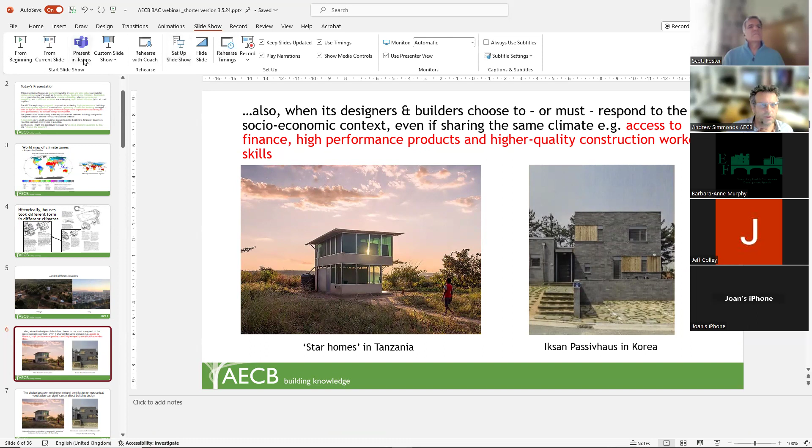Thank you, thank you, right, it was good to be here. Let me just share the slides there. So okay, so I'm just going to kick off with one slide, and then I'm going to hand over to Huda, and then I'm going to come back to finish off. We're going to go quite fast because this is the edited version and there's quite a lot in it. There's lots of pictures, don't worry, this is the only one with lots of words.

I just wanted to slightly set the scene as to where we're coming from here. So what we're focusing on in this presentation is domestic building. Doesn't mean that this isn't applicable to non-domestic building. We're also focusing on rural or semi-urban context, but I could better describe it as rapidly urbanizing rural contexts, perhaps. The other context is we're focusing on cooling climates, and we are trying to avoid various terms because they're not actually that useful, even if they're a bit disrespectful. So we're not using the term global south - we're being specific about the countries at the moment.

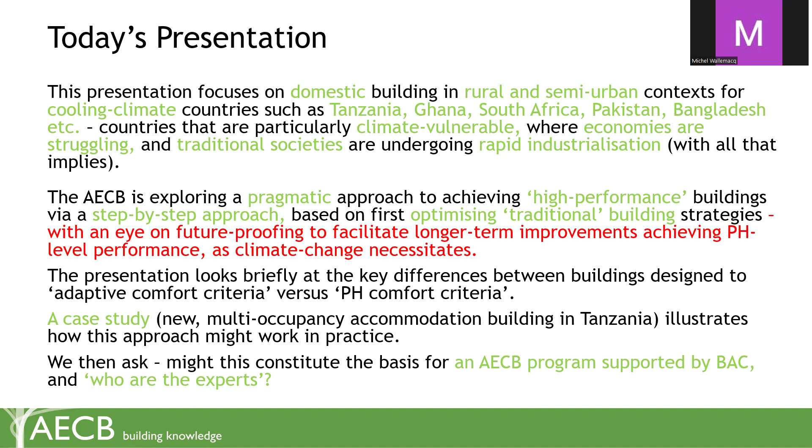Examples of the sort of countries we're talking about are Tanzania, Ghana, South Africa, Pakistan, Bangladesh, and so on. What we're looking at here is countries that are particularly vulnerable to climate change, much more so than countries with more robust infrastructure, perhaps - although, of course, we are all climate vulnerable. Countries where economies are struggling or extremely unequal. I'm not necessarily just talking about Britain, but extremely unequal, and you could say poorer countries, and also where traditional societies are rapidly changing through industrialization. And I could talk a lot about that - just the limited amount I've seen in places like Pakistan and Africa, quite shocking speed.

The AECB, we're an aspirational bunch, but we can also be very pragmatic. Now, over the years, we have developed a common understanding, which will be recognised by all members of AECB, of what a high-performance building means. But we have been slightly questioning that in a couple of instances - one in Britain, because of the decarbonising grid changing the balance between fabric and energy supply, low-carbon energy supply, and also in this context, we've been questioning it as well.

So the sheer scale of the challenge and the sheer speed of basically people building things that are not sustainable and will become increasingly unsustainable has made us start to think about step-by-step approaches, building on what is easier to achieve faster. So we're focusing here on optimizing what might be called traditional building strategies, but what we mustn't do is lock out further improvement that might be able to be made in some of these contexts, for example, towards achieving full passive house levels of performance, but particularly driven by climate change.

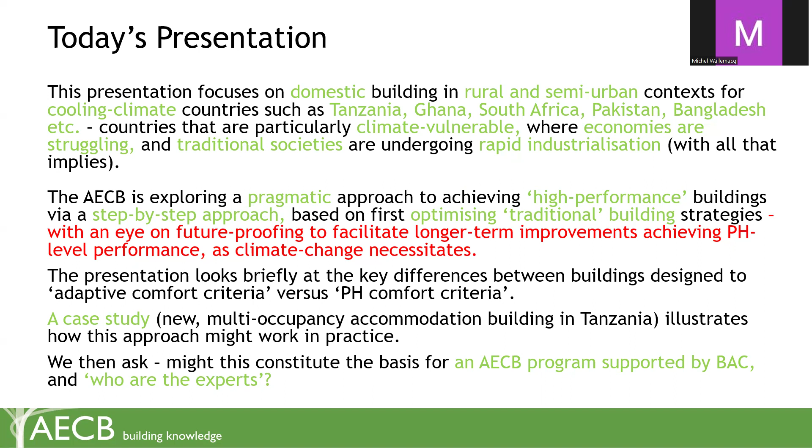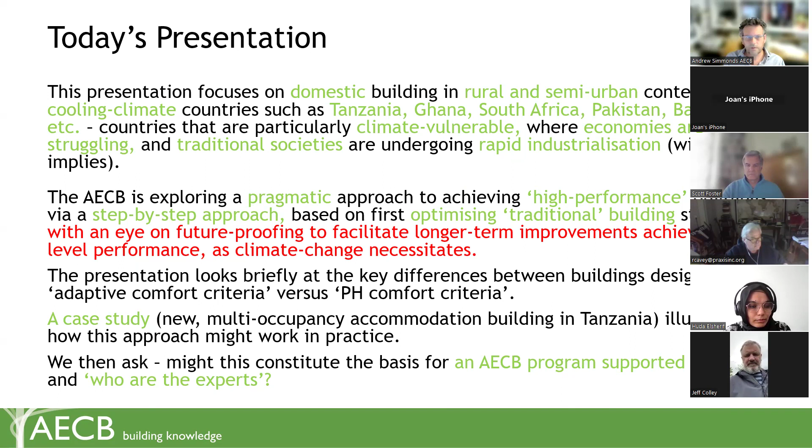Just to illustrate how this approach might work out in practice, and how it worked out in this situation. At the end, this is what we're thinking is a basis for a program that the AECB would like to run and that we would like BAC to support. Underpinning this is who are the experts in a program in this context.

Around the world, there are different climatic zones, and how you classify them depends on the system you're using. At the very basic level, like the passive house divides them into warm, hot, cold, based on temperature. But there's a lot more nuance than that: how arid the climate is, the differences between summer and winter, whether there are monsoons. All these small differences impact how a building should be designed.

Can you go to the next slide? Can you hear me? Yeah.

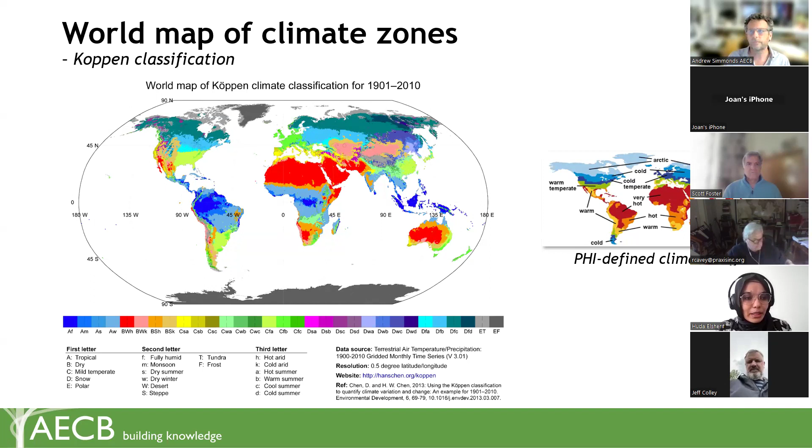Traditionally, most houses were sustainable because people didn't really have an option. Electricity wasn't available, so you had to be passive. These buildings utilized climatic nuances to create a building that was as comfortable as possible. I'm not saying it was as comfortable as a modern building, because there are limitations to what you can do when entirely relying on passive measures. But because of that nuanced design, a sustainable house looked different in each of these climates.

Now, if you think of a lot of modern houses that are not sustainable, why are they not sustainable? Because the house would look the same regardless of the climate it's in, and electricity or energy is being used to offset that. So there is a lot of knowledge that exists in traditional building on how to adapt to different climates.

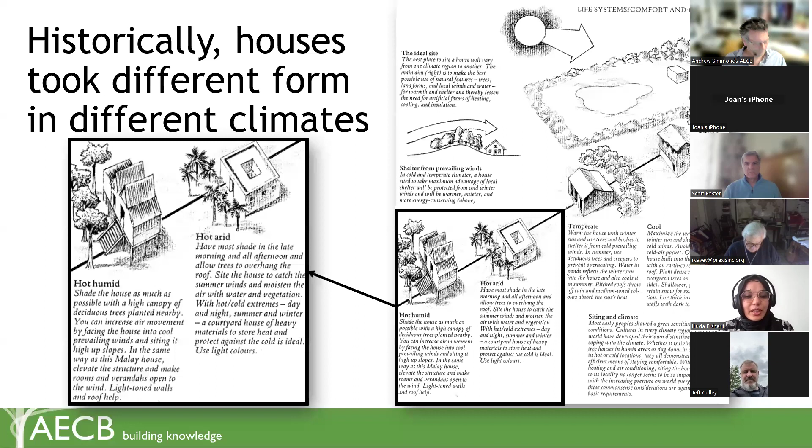What we also need to understand is that these buildings also adapted to the different locations they were in, the different context—whether it was a village, a city, or anywhere in between.

Now, these different contexts are important not just because of location, but also because they mean a different socioeconomic context: different levels of finances available, different materials, different skills and workers available.

So typically when someone thinks of a sustainable house, they think of something like this example, this passive house in Korea—a modern building that is sealed and very high performance. But the building on the other side, the Star Homes building in Tanzania, is also a sustainable house. It's just a different type, on the other end of a spectrum.

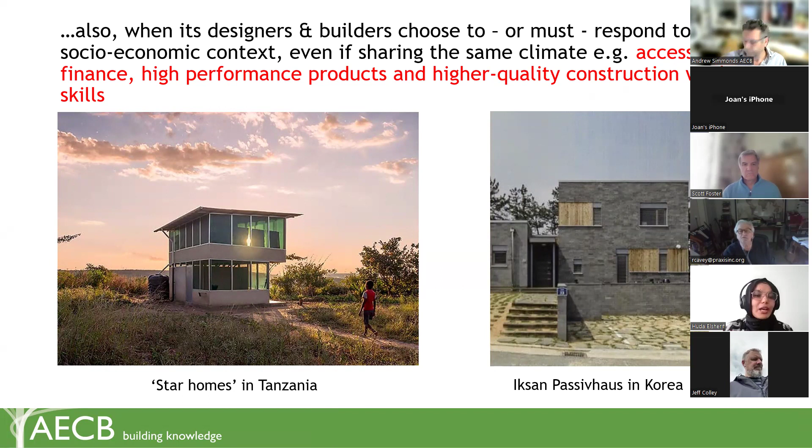These buildings look different because they rely on completely different ventilation systems due to the socioeconomic conditions available. The Star Homes relies on natural ventilation and on occupants being active and interacting with the building to achieve comfort, whereas the passive house relies on mechanical systems achieving that and creating very static, steady temperature conditions inside the building.

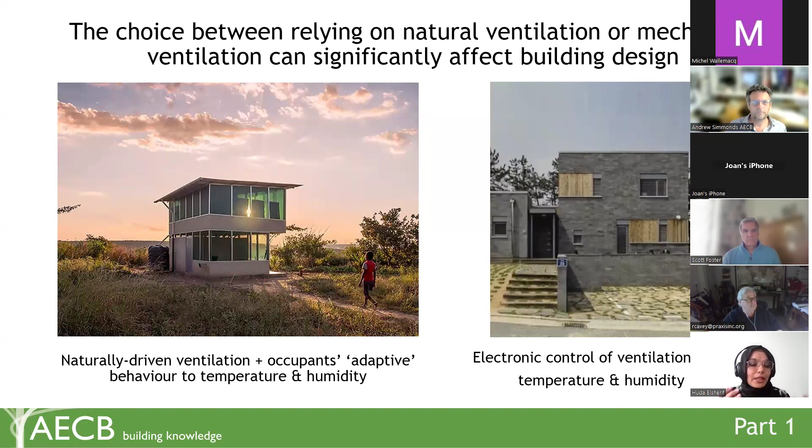Because of these different ventilation systems and different outlooks to climatic control, if you were to assess these buildings, since they're different, you have to assess them using a different standard. Here you have the ASHRAE standard, which has an adaptive thermal comfort version and a steady state version—the two schools of thought in thermal comfort. These align with those two different socioeconomic contexts. The steady state comfort standard is more stringent, whereas the adaptive thermal comfort standard takes into account that people have different psychological, physiological, and behavioral adaptations.

Here's an example: I used this tool and input the same clothing, airspeed, activity level, and humidity, with the same temperature, 28 degrees. You can see in the adaptive comfort model it's comfortable, but in the steady state model it's not, even though everything is the same. This reflects the reality that the comfort range is a lot wider for an adaptive house, whereas it's much tighter for a steady state house like the passive house. But that doesn't mean you can label either of them as uncomfortable.

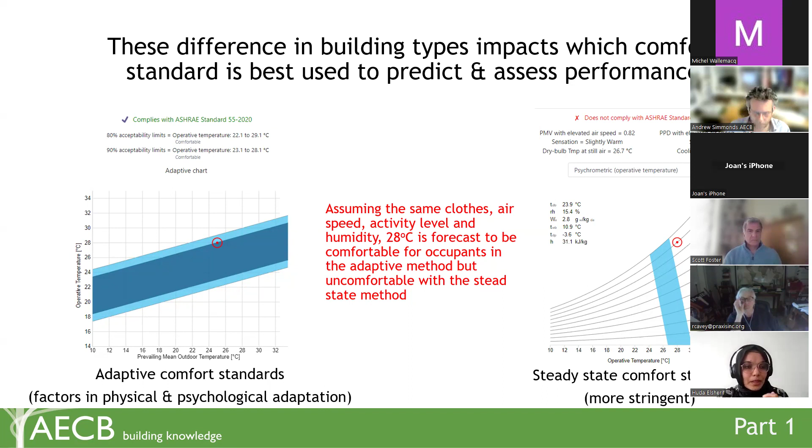Because of how these two buildings approach ventilation and climatic control differently, the sustainable solutions required to reduce their consumption look entirely different as well. The Star homes is a thermally lightweight building. They don't use glass - it looks like it in the photo, but that's actually mosquito netting. It's entirely open to the outdoor air to maximize ventilation, uses shading, and is just open and breezy. Whereas the passive house uses the exact opposite. It relies on creating a bubble, separating the internal environment from the external, and because of that relies on high levels of insulation and airtightness to keep the heat and humidity from entering the building.

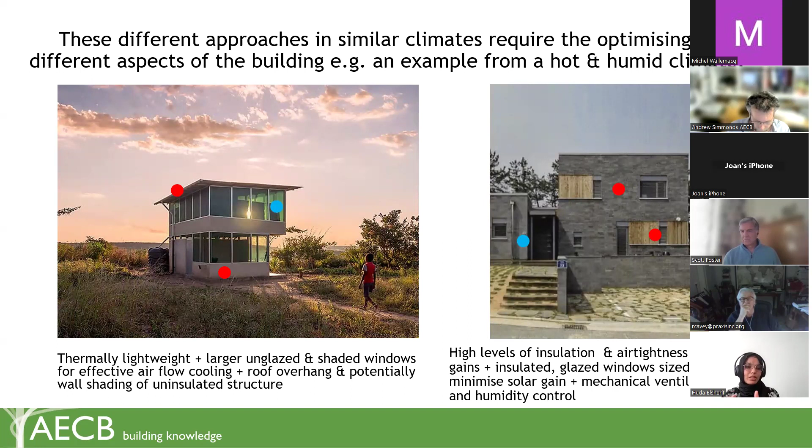This huge difference between the two houses is because it's a hot, humid climate. But in this example, from my research in Sudan, which is a hot, dry climate, the differences between an air-conditioned space and a naturally ventilated space used during the day are very minimal. The only difference is how much volume is optimal. If anything, there are bigger differences when you optimize a space to be naturally ventilated and used during the day versus used during the night. So again, these differences in optimization are different whether you're in a hot, humid climate or a hot, dry climate.

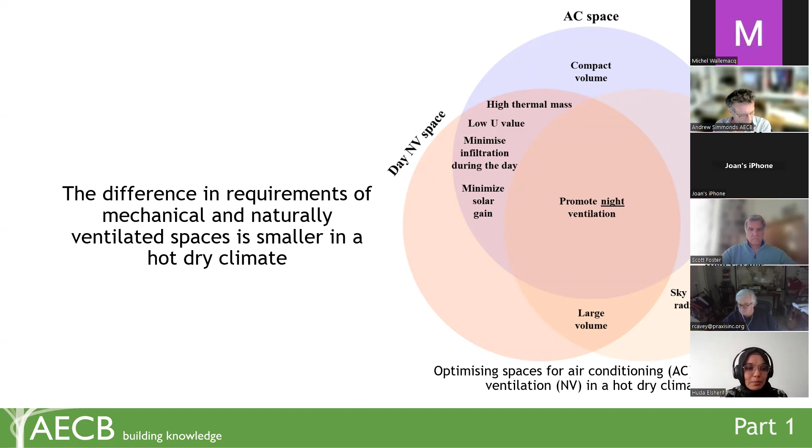But those two buildings represent two ends, a black and a white - they're completely different. The reality is, in developing countries, most buildings are somewhere in the middle, because as we mentioned before, these are rapidly industrializing contexts, and you'll have a mix and match of situations where it doesn't fit into either of those boxes.

So you have the Star home, the naturally ventilated one, on one end, and the passive house on the other. In the middle, you have mixed mode buildings that suit people with a context in the middle. What do I mean by a context in the middle? It could be that you don't have enough finances for a fully air-conditioned building, but you also want a higher comfort level than possibly achievable by a naturally ventilated building, which is a lot of what is happening in these contexts. What people do is just add an air conditioner to a building that is naturally ventilated.

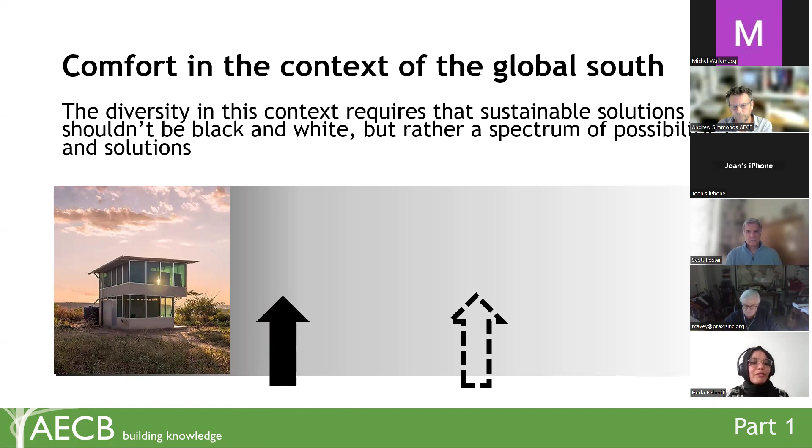So what we're trying to do is plan for that, to create mixed mode buildings where there is that fluidity and movement. Our current eco-village design falls closer to the naturally ventilated end, but we're hoping to create a design where in the future it can be run as more air conditioned in parts of it, not the entire house, and then go back to being fully naturally ventilated during seasons where it's not as hot. So again, a pragmatic approach where we can't fully air condition the building, but we need more comfort than a naturally ventilated building can provide. We create zones in the building that can function as that.

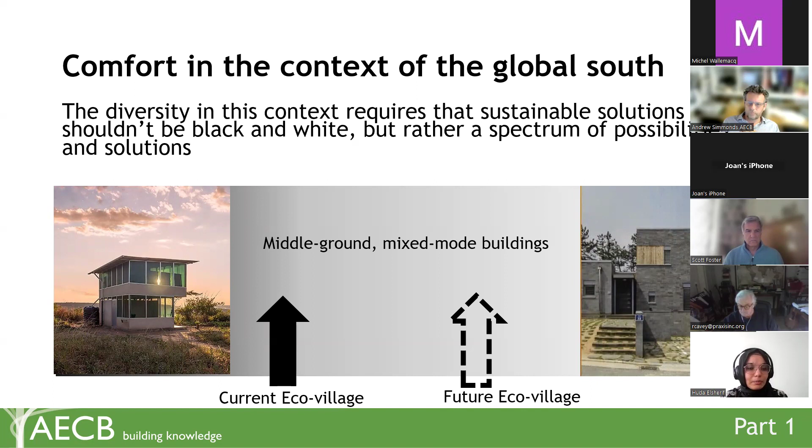The reason this is important is because just creating a reduction of 1 degree can have an impact. Just creating a reduction of 1 hour spent not in a completely air-conditioned space can make a difference. Every little counts - we're trying to move away from an all or nothing approach, trying to do as much as we can with the resources that we have.

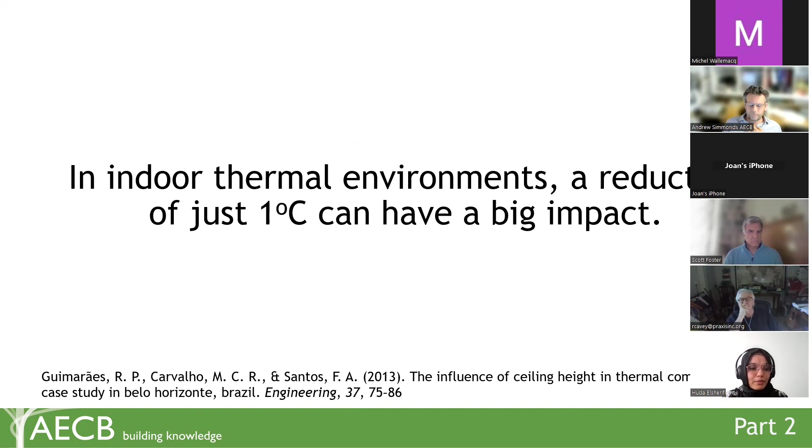Thanks, Huda, that's great. I always enjoy listening to you, even though I've heard it several times now.

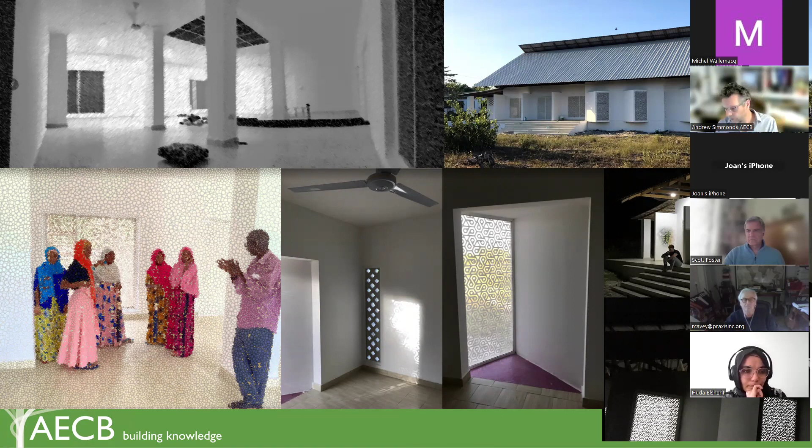So we obviously want this, what we're doing, to ripple out into the local community. So this eco-village sits within a larger community of villages and developments and businesses and so on.

I think typically it's a series of trades managed quite slowly over time. Foundations go in, and then walls are built, and then, sometime later, when the money's been saved up, the roof goes on, and so on.

Each house in the villages I've seen has quite a decent garden. Not self-sufficient size, but a decent garden. The sewage goes into a septic tank and is technically meant to be emptied, but they basically just sit there, overflowing into the sand. That's another issue we've been dealing with, which we're not covering here.

And then you have a series of quite large numbers, not the majority of homes, but quite large numbers of developer-led homes, which are designed specifically for air conditioning.

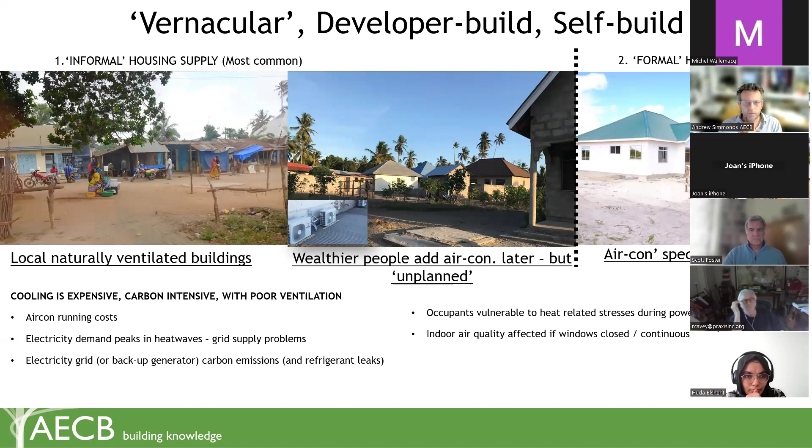So where can we help? Where do we think our optimized traditional approach can help? We think probably not the formal housing supply. Maybe interesting conversations could happen about going straight to passive house with developers - maybe that's a vector for passive house. But certainly in this informal housing supply sector, we think we can help.

Because there are some easy wins: better orientation, better shading, more reflective materials to reflect heat shedding from roofs, better coordination. I think some business opportunities in window design to do with insect protection, security, shading and privacy. Some quite clever ideas could come out of that which could form the basis of businesses.

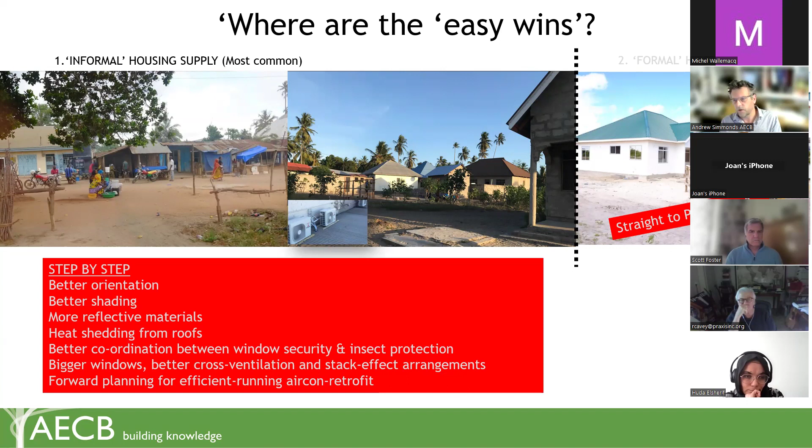Better cross ventilation and stack effect arrangements - relatively simple things that can be done to, as Huda says, just make that little bit of difference, either reduce temperature or give better higher airflow for cooling. And then, a bit more tricky, how do we encourage people to plan ahead so that when they do come to fit an aircon, it's likely to be easy to install without too much demolition, and also runs efficiently. So the site itself, just excuse me while I shut the door.

Hey. I'll be honest, that was some teenagers being noisy.

Sorted. So here's the site, a 30-acre site. It was donated to the charity for the purpose of developing it for an orphanage. Basically, it is the swamp of the area, a very pretty, ecologically rich swamp - it was bulldozed before the charity stopped it and said, no, we don't want it bulldozed, we want to have it as it is. But it is basically the drainage basin for the surrounding area.

Now, they're lucky because they fundraised and put boreholes in, so they have good drinking water, which they can also use for agricultural purposes. They've got a dedicated area that they retained for wildlife - so there's a quite rich, interesting wildlife in that bottom corner there, which of course comes and goes across the boundaries. There's some nice cooling winds that move across the site.

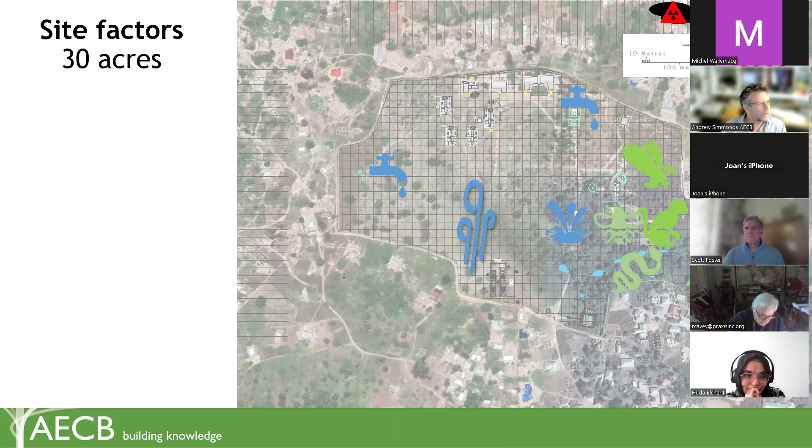Factories, of course, have been coming in, and they tend to be built around watercourses with some very impressive looking environmental protection plans, which are, it appears, almost without exception, not implemented properly. Now, for the last 10 years, this has been going on whilst East Africa has been suffering a drought, very dry weather and droughts.

As you probably picked up in the news, that appears to have turned to more intense rain, and there has been a lot of flooding, including affecting the eco-village. A lot of this urbanization has happened - this is an old map, so there's actually a lot more housing around the eco-village now, built during that dry period. Now we're seeing increased runoff and speed of runoff from those houses and developments right into the eco-village, and that's something we've been dealing with these last 2 or 3 weeks.

Noise is another issue. At the moment it's not traffic noise, it's amplified music, church noise - church PA systems is something I noticed there. Along with the factories and the runoff from the houses, we are seeing oil and other pollutants going into the watercourses. In the case of the factories, that can be quite serious, and in the case of washing cars and trucks, that can also be quite serious. So that's a growing concern.

And then, of course, the wildlife doesn't respect boundaries - monkeys, snakes, and insects are not something the increasing numbers of people around the site are always that keen on. So there's quite a lot of liaison going on between the eco-village, the local council, and the local community.

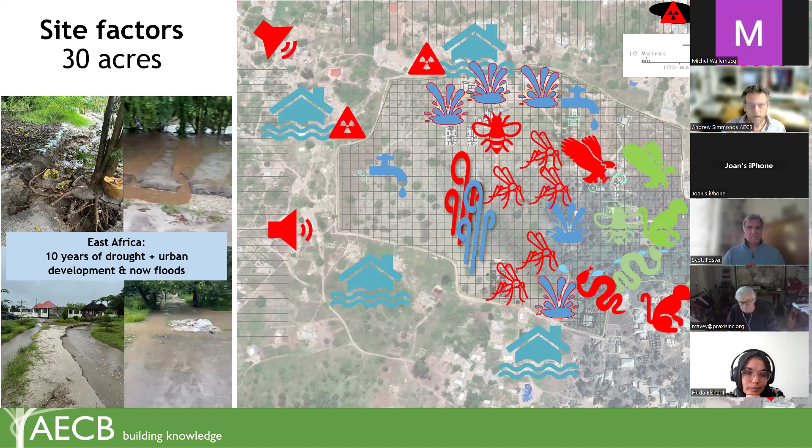Now, the design brief - this is a few short slides. The original design brief in 2017 was basically to accommodate 10 children and their mother, with a large multi-purpose space, bedrooms, and a toilet block. We decided that the thermal conditions under the large cashew nut tree, where everybody met for meetings, were pretty perfect, and that is what we should aim for, with added features of weather protection, mosquito protection, security, and privacy for the girls.

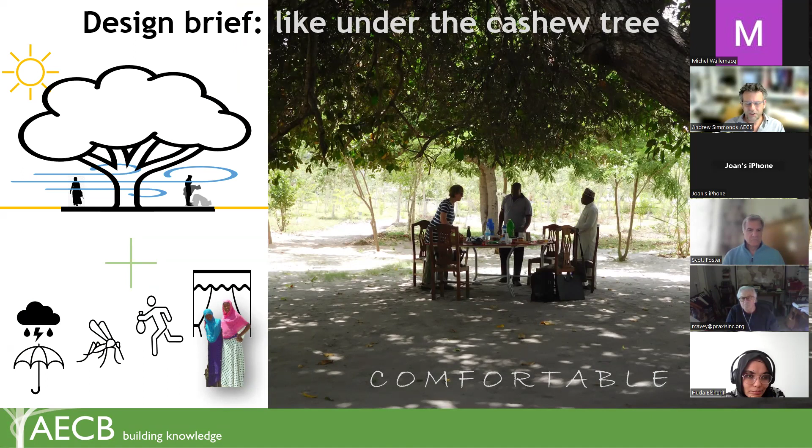As an aside, one of the colleagues in this group, Dr. Ben Roberts, has been working out in Ghana, and one of their projects is to look at the conditions in existing housing - what are the thermal conditions. As you can imagine from the way housing is now built, and even some of the older, more traditional housing with thatched roofs, those are very uncomfortable and unhealthy temperatures to be living and working in.

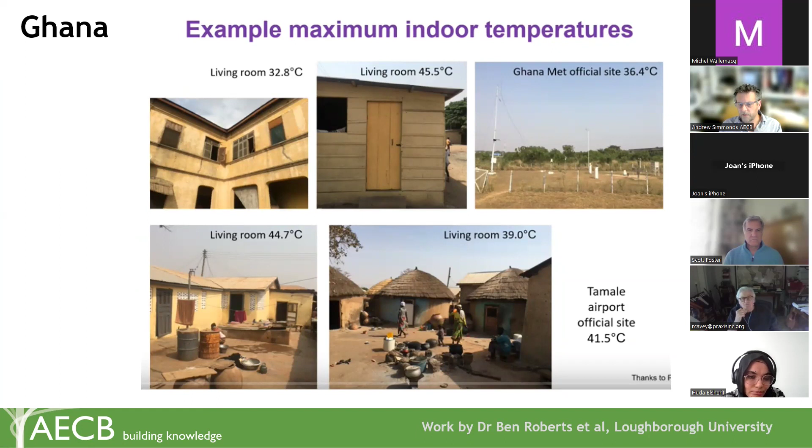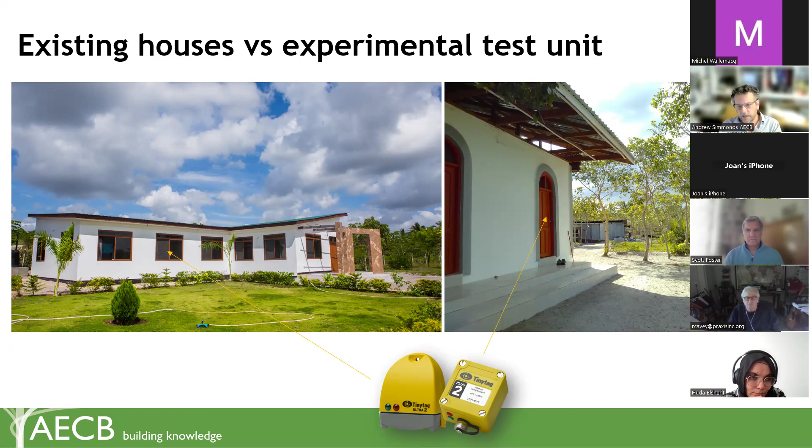We, of course, needed a benchmark to see whether our ideas would work. The charity accepted the idea of building a test unit, which is on the right, alongside the existing houses on site, which were overheating. This wasn't the only reason they asked for new houses, but they were overheating. So we looked at monitoring both, basically, so we could see whether our proposed ideas worked.

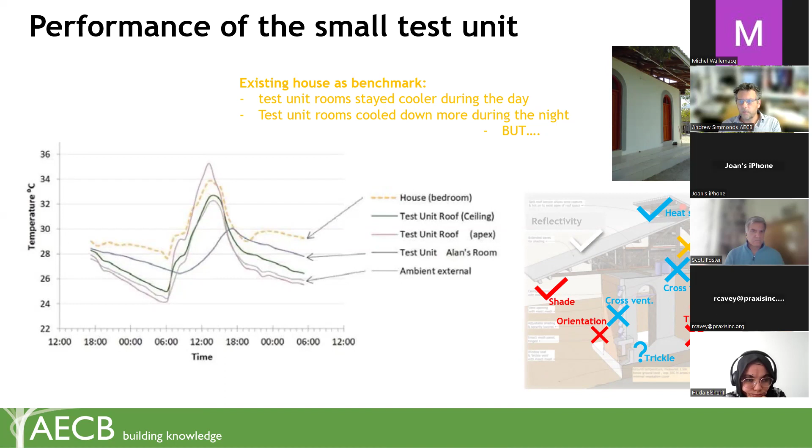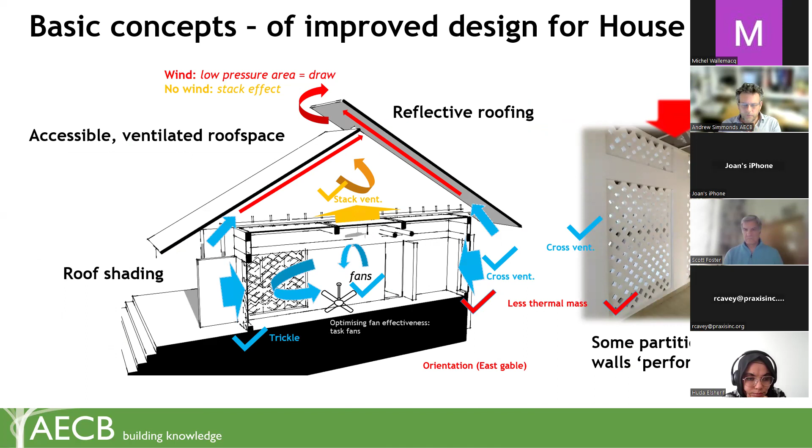We got some very useful data back from the test unit and compared it, benchmarked it to the existing house. The little building we designed with these features did seem to stay cooler during the day, and it cooled down more quickly at night, but there were still problems which we picked up through this monitoring. So as part of the design for the actual house, the main 10-person house, we made sure we sorted those problems at design stage - particularly cross ventilation, enhancing the stack effect, enlarging windows, and a few other tweaks. And then that's basically what we built.

So you can see a little diagram there, bottom right. The roofs, the heat shedding, the hot roofs allowing hot air to escape from the attics, drawing air through the building, the extensive wall shading, and so on - those are relatively easy things. Windows are tricky.

In this particular case, we found a local factory that could do laser cutting of steel sheets. So rather than steel bars across the windows, we had a decorative pattern that our colleagues Hannah and Otis helped us with - a decorative pattern that acts as security, provides a degree of shading, although not a lot of sun falls on those windows, and then a removable panel with insect mesh behind that.

So that's the second layer. That obviously slows the cooling air down through the windows, but doesn't impede it too much.

What we're not sure about is whether there is enough privacy with that visual filtering, and this is where we need feedback from the girls when they're in. It may be that we don't need further privacy.

And do we need to help the girls stop so much air coming through the windows, because they might feel cold at 25 degrees? Some people will put on a jumper - we wouldn't, I don't - but we have to be aware of those different levels of adaptation to local temperatures.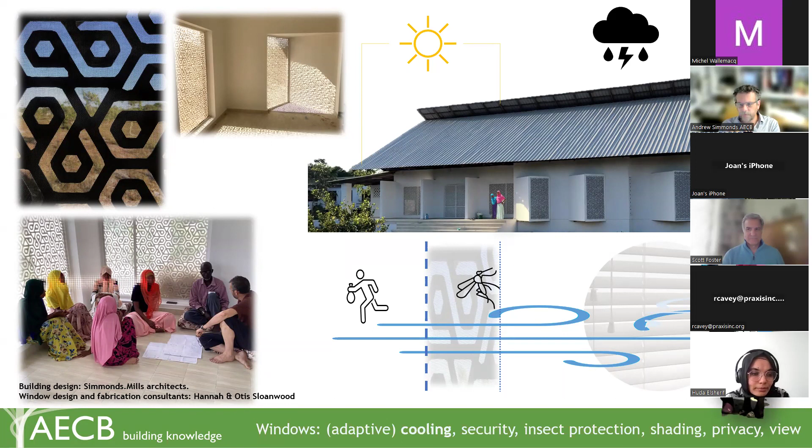So we analysed the data, cut it, diced it, understood it, and then tried to think how we can take our experience of that building, the forthcoming feedback from the girls, and use the comfort models we have to predict future designs.

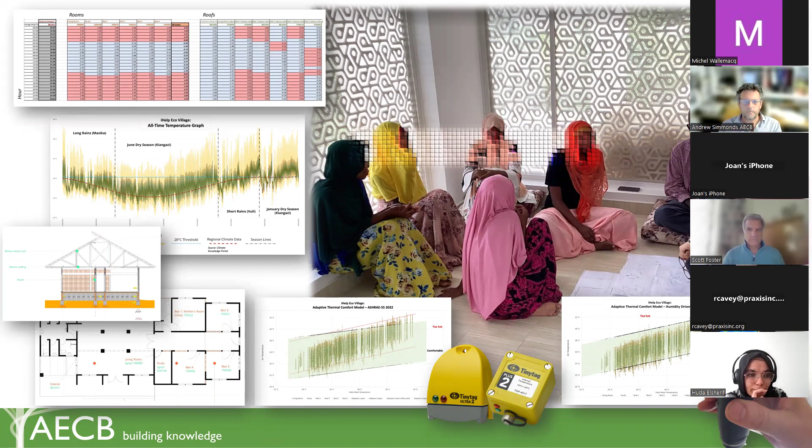Now, this is where I'm going to ask Huda just to step in for the two slides here. Huda, if you don't mind.

So when we were assessing, this is an adaptive thermal comfort model because this building is naturally ventilated. But for an adaptive thermal comfort model to be accurate, it needs to be based on local standards as much as possible, because each region has its own thermal comfort temperature and range. There isn't anything specifically for Tanzania that we could use.

So we did two models to try out and understand. The first is the ASHRAE adaptive thermal comfort model, which is more generic, used for hot, humid, and dry climates. It's a good starting point, and it initially shows we do have some overheating, as you can see from the daily mean of around 29. You can see in that top area there is a bit of overheating.

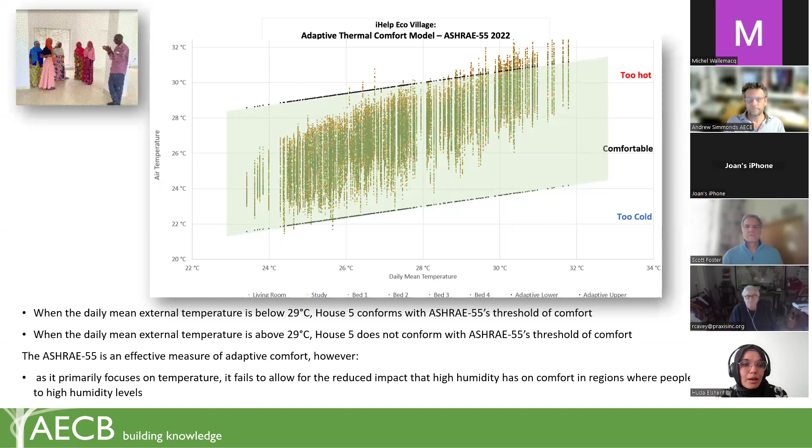Next slide. But then we found another thermal comfort model that has humidity put into it. It had three different tiers for hot, dry climates and hot, humid climates, and we used the hot, humid criteria. When you look at that, it looks like we're doing quite good - it's really comfortable. If anything, there is a bit of overcooling happening.

And again, like Andy mentioned, we might actually need to somehow slow down the winds, because one caveat of this model is that it has to have high air speeds, otherwise it won't be comfortable. So we can't just say the building is comfortable as is.

We know from our research that the building can achieve quite good air speeds, and we're also planning to supplement that with a good fan design to make sure that when there isn't any air, the occupants can be comfortable. We can't just rely on temperatures alone.

Yes, thanks. The one thing we haven't had time to put into this slideshow is that we're trying to use the real life data we're getting to calibrate the models we use to assess a design stage. So Huda has done some insolation modelling to see how much sun falls on the building.

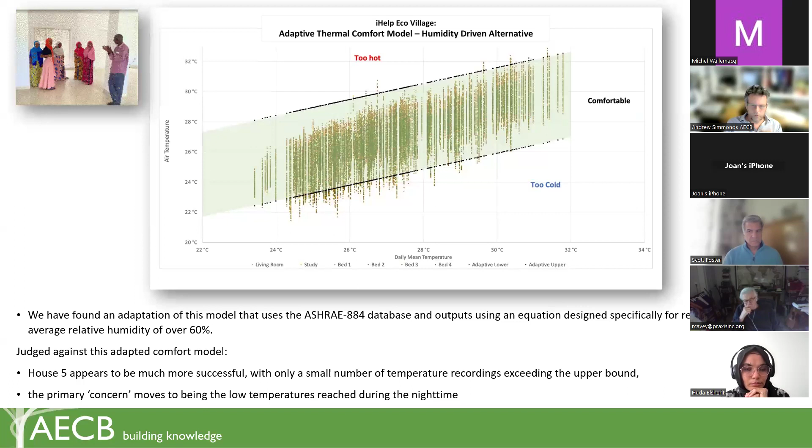And just to assess shading features, she's also had a look at computational fluid dynamics, CFD, which basically looks at likely airflow and air speeds across the building, to test out some of our more whimsical ideas about double height spaces and cross ventilation ideas. What we're trying to do is calibrate the tools for particular climate regions so that we can anticipate designs rather than just monitoring what's built, which is a much slower way of learning.

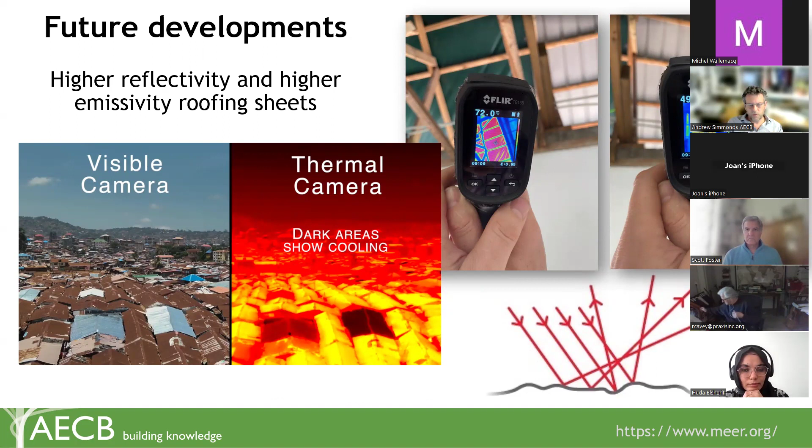Future developments then. There's some interesting potential for different coatings on metal roofs, which is a low-cost, fast retrofit. There's a very interesting organisation we want to be part of our group, MEER, which is Mirrors to Cool the World. They've been doing research into how, in South Africa and countries all around the world, changing the surface coatings and colours of shantytown roofs can have benefits, which is interesting.

There are simple things like fan design, which Huda has mentioned - ceiling fans, but also sometimes wall-mounted fans are better. We also want to explore task fans, to check the effectiveness of placing fans in different places and having the freedom to move those around.

It's pretty obvious to us, moving across the site in the eco-village, that it's a lot cooler in areas where trees have been planted, but it takes time for those to grow, and there are issues about whether you're trying to use food trees, and there's an animal issue to that.

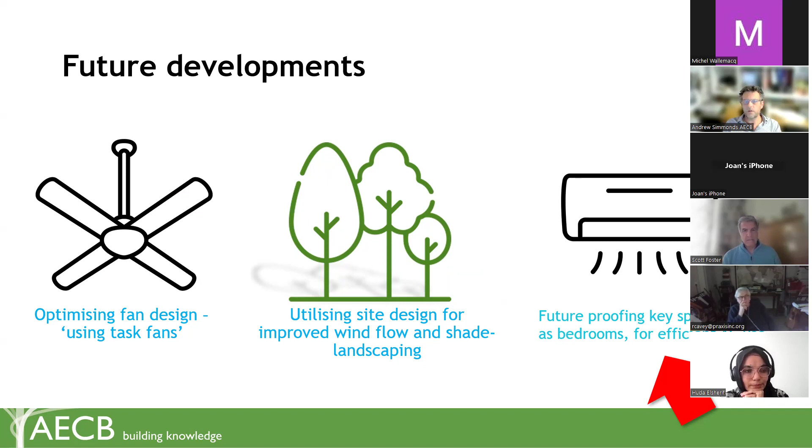That is definitely a no-brainer, but it takes longer. But of course, what we do have to be really on top of is how we future-proof these spaces, knowing that some people will be putting aircon in. So the question is: is our approach open to allow for that?

If we were to do the step-by-step approach based on optimizing adaptive comfort measures in building design, are we looking out for future improvement toward passive house retrofit standards in the medium or longer term? That's a little more complicated. We started thinking about that, and we're going to do some modeling in the next few weeks to start exploring it. I guess that's the next step for us.

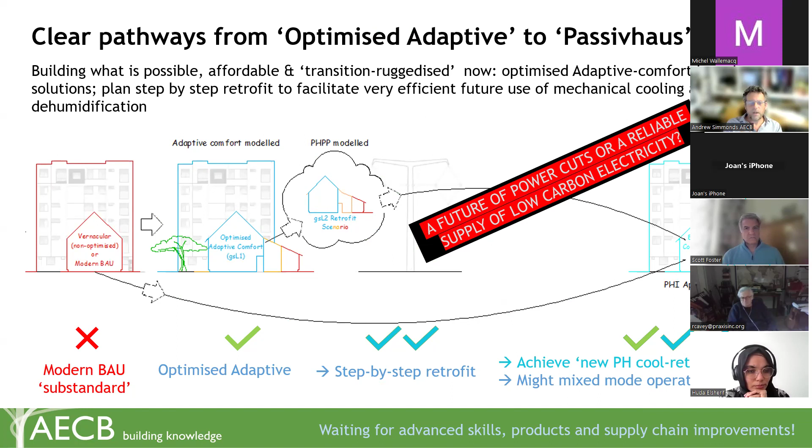How might that look? You'll all be familiar with the sort of things you have to do to take a building to passive house standard. We haven't got time now, but in questions maybe we can tease out some of this. I think we've still got time for that. So there are complications, but we've started thinking about it.

And Huda's approach of zoning means future improvements to buildings don't have to take the whole building to passive house levels. Zones could be taken, bedrooms, for example, or study rooms, whereas the living room areas could manage to ride through heat waves without using air conditioning because of patterns of activity.

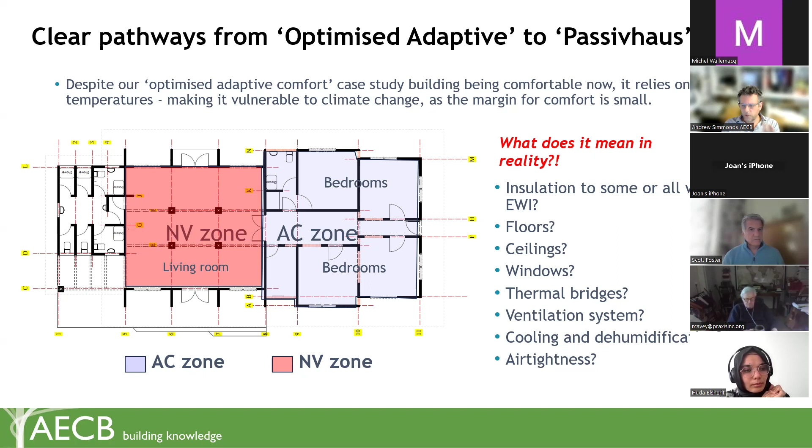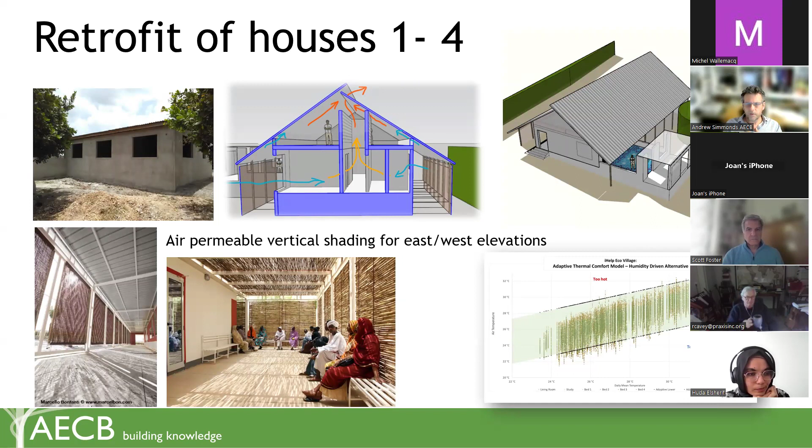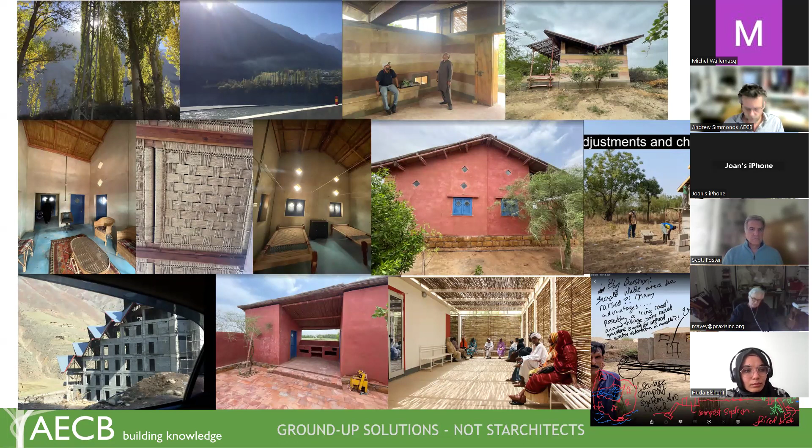So who are the experts? Well, not starchitects, we think. There's a lot of mileage in work that people are already doing, but it perhaps hasn't been elevated enough or turned into guidance that's available to more people. There are some very effective buildings out there using these passive techniques, and a lot of buildings have been put up that with very minor tweaks could make big differences in terms of temperature and cross ventilation. Thanks.